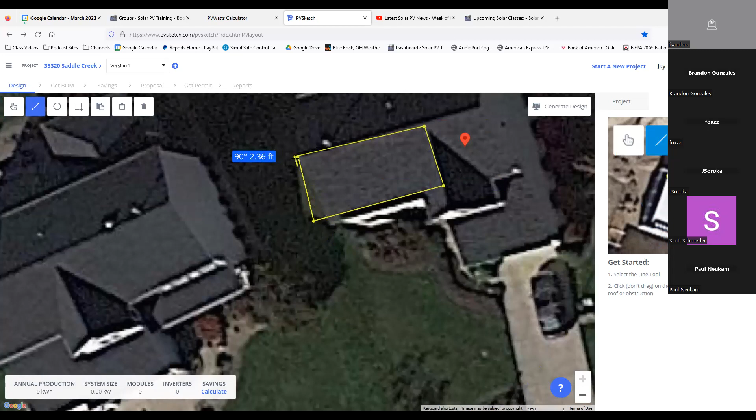It looks like the shadows are a little bit tough to see. But is this a flat surface basically that I've just outlined there? It is. Okay. So in this case, I've defined... Actually, I think you cut part of the part that juts out a little bit. That bottom right corner is actually on top of a non-flat part. That should be pulled in a little bit.

Oh, okay. Down here? Yeah, should pull that. Or up. No, you can't. Well, I think you might be able to. I think I've just got to get out of that tool and there we go. That's it. Something like that. Yeah. All right. So now you can see the arrow is pointing you off west.

So I've got to make some changes over here to readjust the azimuth. It really just does this based on which corner I started at. So I guess if you practice with it, you'll avoid that problem. But it's showing it at 256. So if we deduct 90 from that, we're going to be at 166. Let's try that. Yeah. So the arrow looks like it's going the right way. So your azimuth is going to be 166.

Do you have a sense of the slope of the roof? None whatsoever. Take a guess. Standard. Yeah, standard's 20 degrees. You could take your smartphone and measure it, stick your hand out a window and measure it if you want. Then the height, is this 2 stories? Yep. Okay. So it might be, let's say, 20 feet high. You don't have to be that exact. And because it's residential, we're going to be a 36-inch setback.

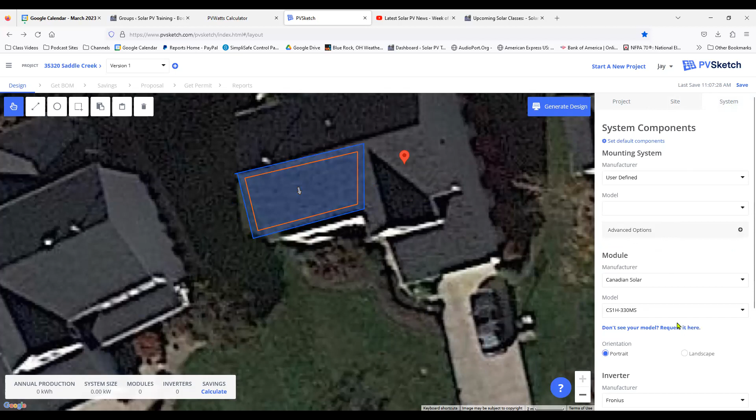So now I'm going to go into the system and just randomly pick some panels. I'm going to say a Canadian Solar 330 watt panel, because I'm going to use some microinverters on this. So I'll use the Enphase microinverter, the latest version, which is the IQ8. So we'll go with the state-of-the-art stuff. And then you'll have to decide, is it going to be portrait or landscape?

I assume your rafters go from the eave to the peak. Is that right? Like trusses in there, where the support rafter goes from the eave to the peak. So they would be running north-south instead of east-west. I think so. I haven't looked up there in a while, but I'm pretty sure they do. Yeah, just based on the way the house looks like it's built.

So if the rafters are going north-south, then the rails are going to go east-west, which means the panels are going to go north-south on the rails, because you always bisect the longer portion of the panel. So in that case, the panels are going to be portrait. So now I've defined that. System losses, I'm going to change to 8%, because that's the number I like to use with microinverters, because they're a little more efficient.

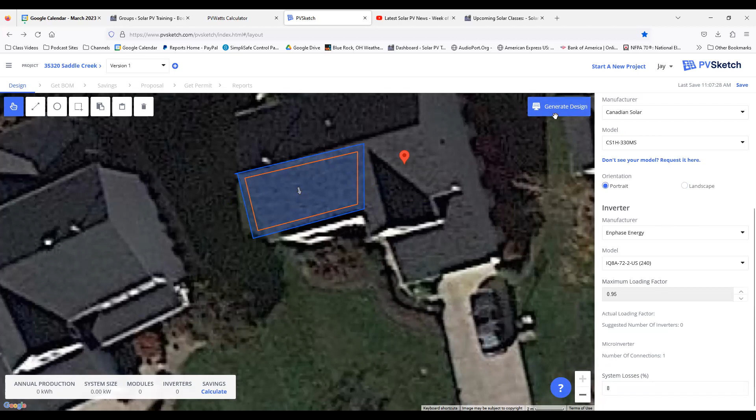Now you hit the button that says generate design, and it's going to automatically take the modules that I've selected and fit them within the area that is available. So in this case, within that section of roof, I can put a 4.29 kW array, or 13 panels. That's going to generate a little less than 6,000 kilowatt hours per year, 5914. Well, your usage shows 6237. So you're pretty good there.

In fact, I'll bet you if I go to a slightly larger solar panel, let's see what happens if I go to the 335.

Yeah, that kicked it up just over 6,000. So we go to a slightly larger solar panel. So I would say that this, if I were designing your house, rather than trying to put them in another area as well, I'd be kind of happy with it as it is.

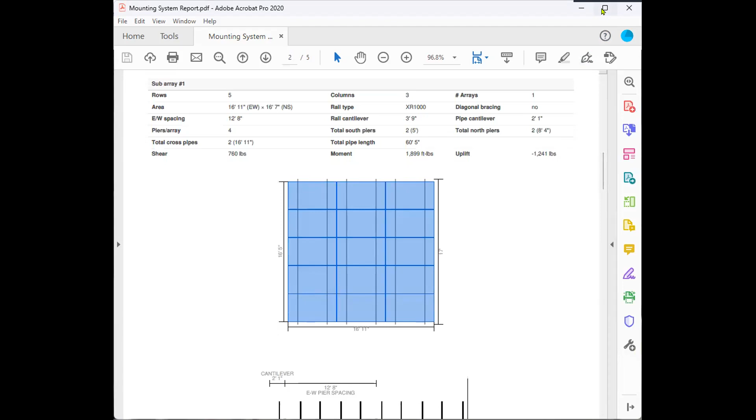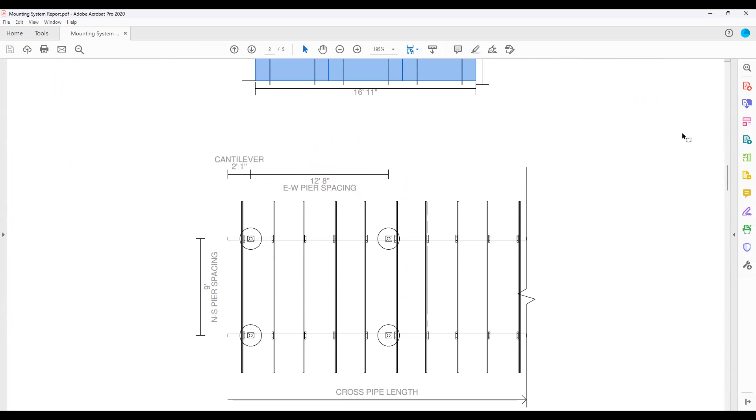But what's really helpful is as you go down through this, it's going to start showing what the spans are. So here between the vertical piers, I can go 12 foot, 8 inches with a 2 foot, 1 inch cantilever, which is basically how far it extends beyond the pier, the vertical pier. This is a ground mounted system, by the way. And then it shows what kind of concrete requirements are here for the engineering for a side view. It shows all the little bits.

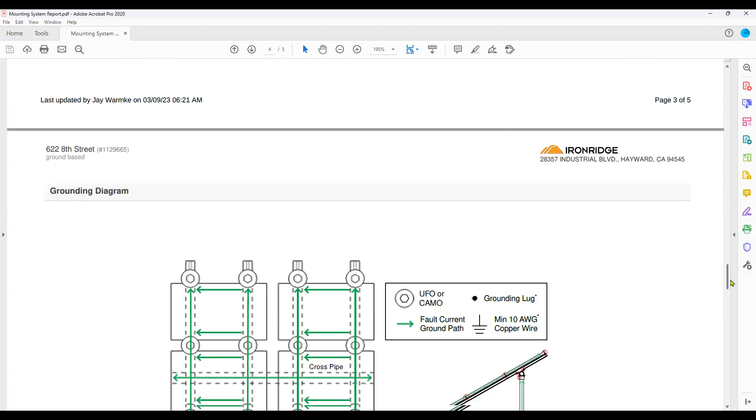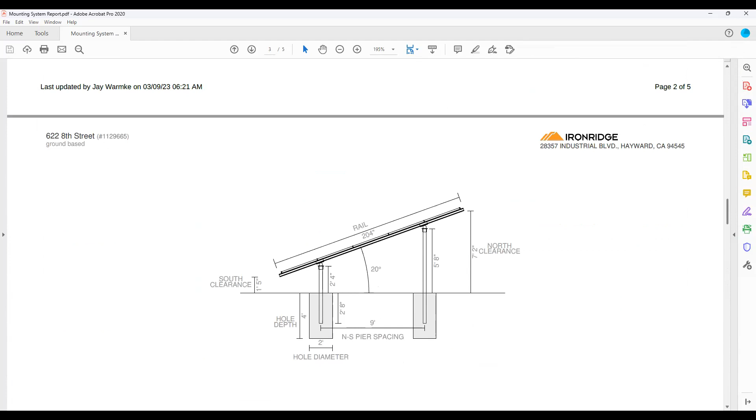And you can bring something like this down to your planning department. And these things are pre-engineered. So if your planning department has an issue with it, IronRidge will give you a phone number, have the planning department call up, they'll talk to their professional engineers, and the professional engineers will walk it through. You can even get printouts of engineer stamped documents if you need them. So that's one advantage of using a system like that. And pretty much all the manufacturers will do this.

As opposed to you just writing it out saying, I thought it was a good idea, try and convince the planning officer, the code officials, that you thought your thing was a good idea. And it's a lot more convincing if you say, here's 17 professional engineers who will talk to you until you're blue in the face. And it's been installed in 10,000 different places and not nary a problem. So that's kind of the racking system, the structural system. That's kind of what they're going to worry about.

Then let's see. So we've got your array size. Let's just do a one-line diagram here of what we're talking about now. So this is Albert's system. It's going to be a roof-mounted system. How many panels were in your array? Was it 14? Is that right? There are 14, yeah. 14 panels. I said that these panels were 335 watt.

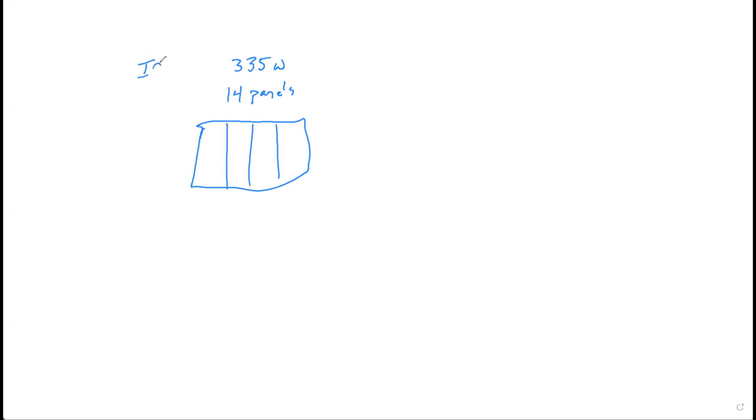And I know that the IQ8 generates 300 watt. So if we wanted to know what the inverter to load ratio is, we would just simply take 335 divided by 300, and you see it's about 1.1 and some change. That's the clipping aspect of all of this. That's your inverter to load ratio.

If I want to know how much in amps each of these are going to be generating, well, the output is 240 volts. So the inverter generates 300 watts maximum, 240 volt. So what is our amps? Since watts equals amps times volts, it's 1 point something. Yeah. 1.25. Is that right?

Somebody with a calculator? Yes, 1.25. Okay. So each panel is going to generate 1.25 amps. Now, if you go into the spec sheet, this is kind of the easy way of doing your solar string calculations, because these are generating AC, so there are no strings. Everything is connected in a proprietary parallel connection cable.

So when I hook up 14 panels, the voltage remains the same. It's always going to be 240 volts, but the amps will increase for every panel I hook up. I can look on my IQ8 spec sheet, and it will tell me how many IQ8s I can hook up in parallel before I've exceeded the capacity of the proprietary cable that they provide. I'm not quite sure how many that is. It seems to me it's 16.

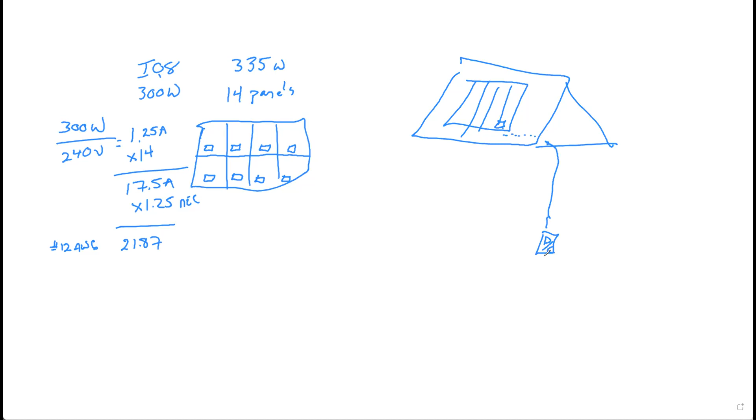Let's say I've got a solar array up here on the roof. A typical way we used to install these things is, let's say I'm going to have my combiner box or junction box under the array. I'm going to penetrate into the attic, run it over in the attic to the side of the house, come out the side of the house, and go down to a DC disconnect. Then I'm going to go into the basement. So let's say this is the first floor. Kind of put the DC disconnect too low. I'm going to go into the basement and connect in to my inverter.

Again, this used to be a very standard way of designing a system. Then from the inverter, you're going to come out to the side of the house and connect to your AC disconnect. And then from the AC disconnect, you're going to go back down into the basement and hook into your service panel. So it was kind of kludgy how all of this stuff worked.

Now, what we're getting to here is the house suddenly catches on fire. There are flames shooting out of the roof, and the firemen show up. First thing they do is find the electric meter and pull the meter. They do that because they don't want live electricity in the house while they're trying to put out the fire. But on the meter, there should be a label that says, hey guys, there's another alternative source of power here at the site. They look around.

That's why your AC disconnect has to be located within 10 feet of the meter. They see this AC disconnect. It says solar system main shutoff. They turn off the AC disconnect. Question you now ask yourself is, where does the system shut down? Let's assume it's bright sunlight. It's the middle of the day.

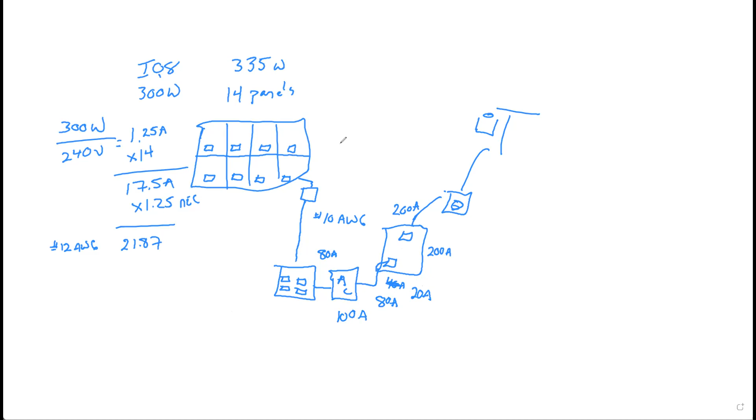We could expand it to 40 amps by doubling this if we needed to. But the reality is, if we needed to do more than that, this panel in this way wouldn't handle it. We'd have to then go to a supply side connection.

And the supply side connection basically says, instead of connecting in here to your service panel, let's take your AC and connect it anywhere between the meter and your main disconnect. So this is the point of connection. Now, certain things are required when you do that.

The minimum ampacity for this wire has to be 60 amps, but we're going to be basing it on 80. The minimum for the AC disconnect has to be 60 amps, but we're going up to 100, so we're fine.

And then we get into the 10-foot tap rule and the 25-foot tap rule. I don't want to get into that at the moment, but this is another option somewhere between there and there. You're not going to need that — your system will never be that big. You don't have enough roof space for it to be that big.

So this would be your microinverter system.

Albert, does that make sense to you? It does. I couldn't do it myself, but it makes sense. Yes, you could — by the end of this class, you could do it yourself. The only thing you're going to lack is confidence and maybe the ability to climb around on your roof.

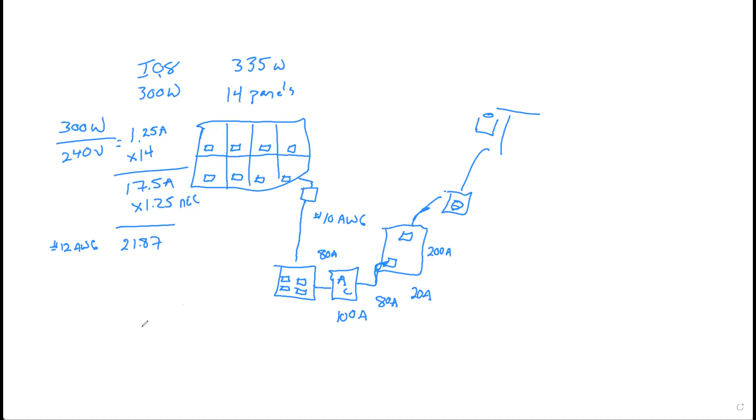I don't know about that, but that's why you hire teenagers — they're expendable. So, all right, this is kind of how you would do that system with a microinverter type system.

Do any of those programs tell you what the cost of materials would be? Some of them will, like the IronRidge system. When you design using the IronRidge system, it'll give you a bill of goods and a retail price. That retail price is usually higher than you can get from a distributor, so that's kind of worst case scenario.

The rest of them, you kind of just have to price individually. You can go into a distributor if I wanted to do the Enphase ensemble system, well, they used to call it the ensemble. I don't know what they call it now, they keep changing their names.

A little bit different system here. With yours, let's say, and this is the system I'm putting in at our office, and I want to now be able to have battery backup, now or in the future. Well, let's say I decide to go now.

The way I would have to change this is now I would have to put in what they're referring to as the smart switch. This is a piece of equipment from Enphase. It costs about $2,000 to $2,500, something like that.

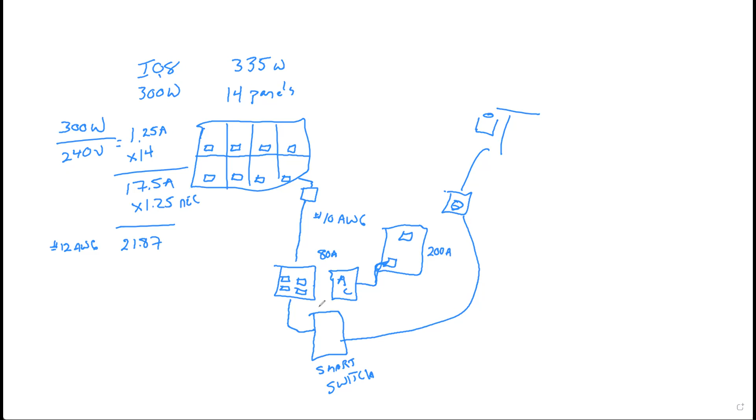Obviously, this is going to require an electrician because the service has to be disconnected. I'm going to get rid of some of this.

So now from the smart switch, we're going to go into the main here. From here, we're going to go to, there will be a disconnect, the rapid shutdown initiator.

Now, this, oh, I didn't want to get rid of that, but since I have it - all right, so this is your service panel. Now just to see what's going on here, another thing you can hook in here is your battery bank.

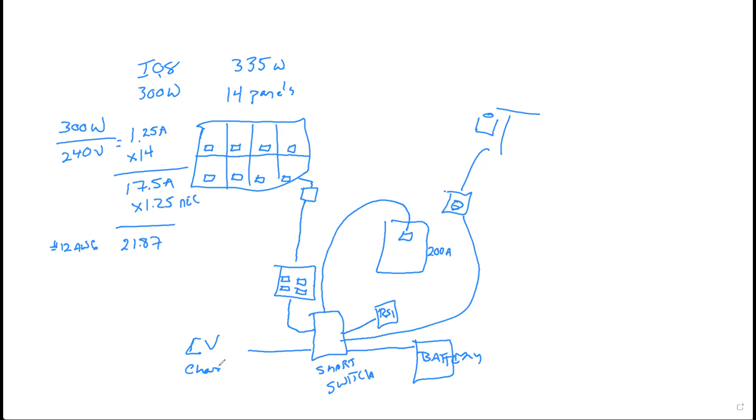Or what I'm going to be hooking in is my EV charger with the battery on my car. So rather than a battery bank, I'm going to use the battery from the EV. Now within here is your auto disconnect.

So we're coming in with our solar array, that's one source of power. We're coming in from the grid, another source of power. We're coming in with an EV charger or a battery bank, or you can put a generator and connect that in here if you want. So that's going to be another source of power, gets connected into this smart switch.

And then it manages all of the load, everything. So if the grid goes down, it's going to automatically disconnect the point of connection from the grid, and now it's going to function to your main from your battery, from your solar array, from your EV. You'll be in standalone mode. When the grid reestablishes itself, it will then reestablish the connection to the grid so that you don't island back out, sending power out there when the grid is down.

You have to have a rapid shutdown initiator because if the first responders come, you've got to be able to turn off all of these power sources and make your home dead.

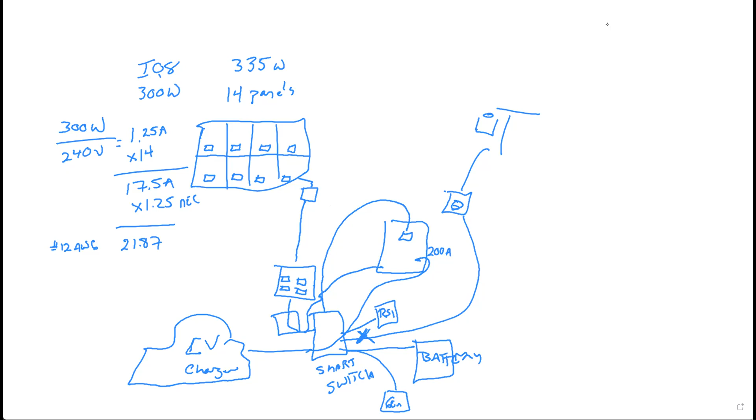Now I'm sure I've confused some people. Is Enphase the only company that makes the smart switch kind of technology?

No, they're all moving towards that, and we're seeing them as DC coupled or AC coupled systems. SolarEdge, they have a system - they call it their StorEdge system. That's the other residential one that's out there. That's a DC coupled system, and their inverter acts like the smart switch. So you just simply hook into the inverter, and the inverter is the place where you would connect in your EV charger. You would connect into the utility through that inverter.

So it's a much simpler system because it's still DC to DC. All of the work handles within the inverter, and the hooking up in these inverters - I'm making it sound more complicated than it is. It's really just connection points, and it says hook your battery in here, positive and negative. Hook your EV charger in here, positive and negative, or two hots and a neutral. It's really pretty straightforward. Then the question is, you just hope it all works when you're done.

Usually you forgot to do something stupid and the system doesn't work, and you spend 6 hours troubleshooting it or whatever.